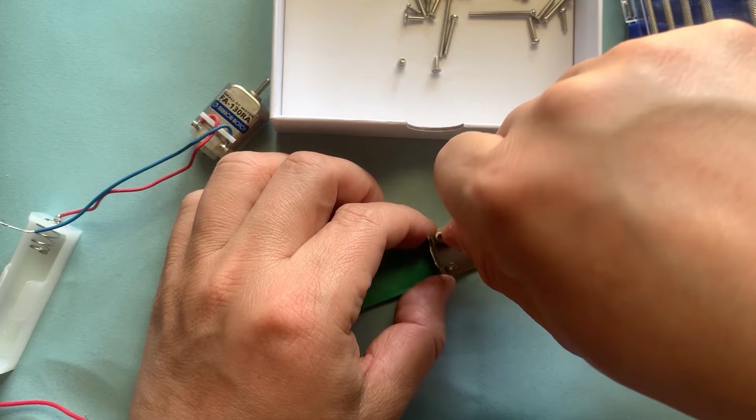When I use tools, the first thing is always safety. The second is preciseness. And the others are quite a lot, such as convenience, price, lifetime, and so on. The motor is small, but we still need to fix it firmly. I use 4 2mm screws. It should be okay, I think.

Then the challenge comes with the shaft coupling. The Mabuchi DC motor uses a 2mm shaft, but usually a mini tool shaft is 2.3mm. It will take more than 2 weeks if I buy it from Amazon Japan. I think it is caused by the COVID-19 influence, since the products are usually made in China and it will take much longer to deliver.

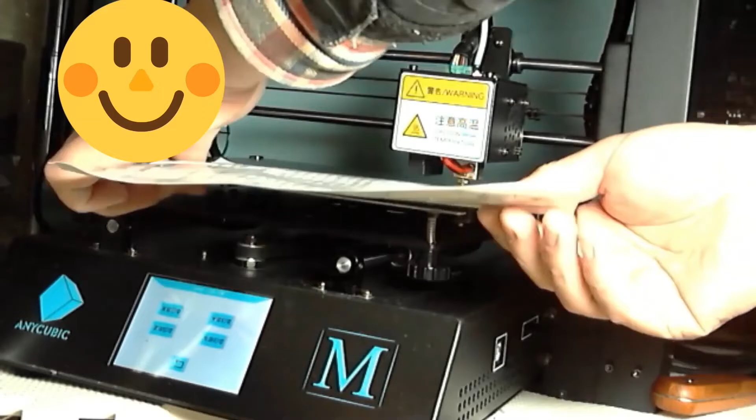Okay, I have a 3D printer now. I can make it myself. Let's do it. The simplest way, just change 2mm to 2.3mm using a straight shaft. I design, print, and test.

It's not stable. Even the drift is small, such as 0.2mm, the high speed enhances the effect and makes it unstable. Then I decided not to use a rough screw and use a screw tap. Try it again. It is still unstable. If I fix the motor, then the head of the drill will vibrate. I figured out that may be caused by the 3D printer processing program. If I fix one side and let the other side be a little bit flexible, the situation may become better.

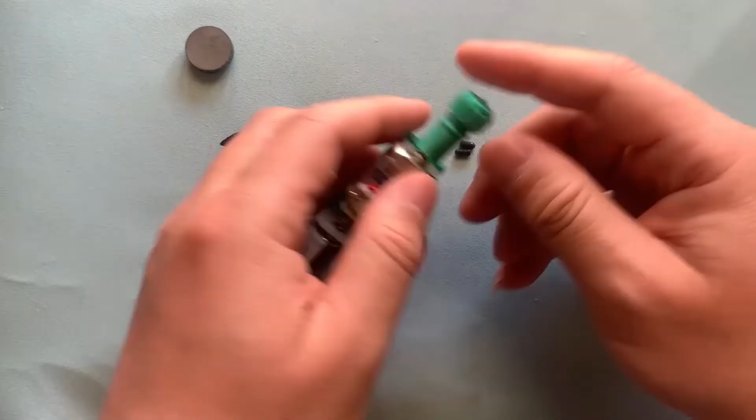I changed the top side to a shaft coupling type. First, try 3 separate types. Still no change. Then, change to 4 separate types. Also no change. I found out that the thread directly attached to the separate parts is not good. It may break the balance between each separate part.

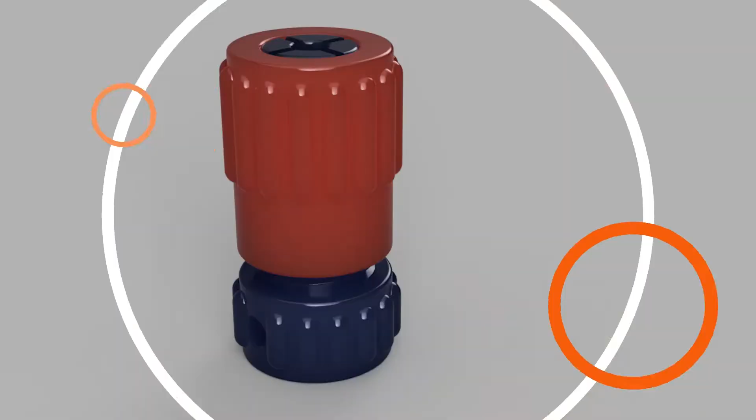I changed the head to a flat type like this. I changed some parameters such as the slit size, the height, the length of the screw, etc. Finally, I got this. It's really good. Now the most difficult part has been solved.

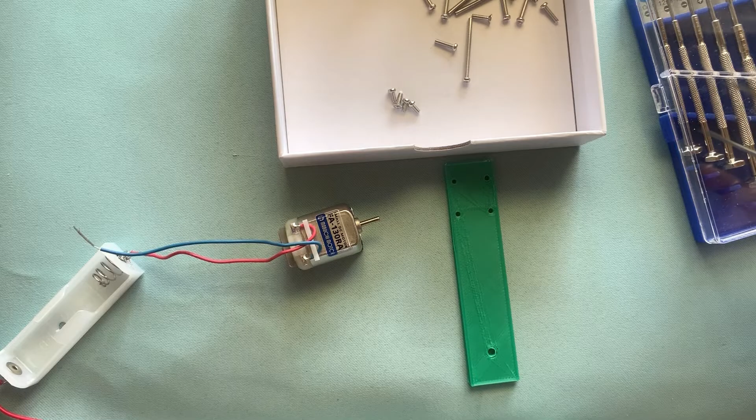I must choose a flat place to fix the motor. Of course, not the simple flat test table. One idea comes to my mind. How about using a pistol, like a revolver? The motor can be settled in the revolver part. Make a room for 2 AA alkaline batteries in the hand part. Okay, let's do it. I searched the internet to find something interesting. There are quite a lot. Finally, I choose this as my model.

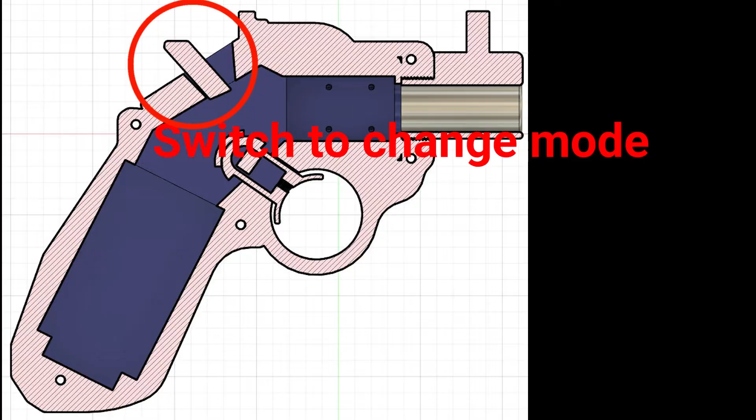I will use Fusion 360 to make it for my mini DC motor drill. First, make a chamber like this. Then put the AA battery box in the hand part. Since I use 2 AA batteries for the power supply, I add a switch to give the drill normal and turbo mode. The circuit is like this. Add a trigger to turn the drill on or off. Add a barrier to protect the head of the drill.

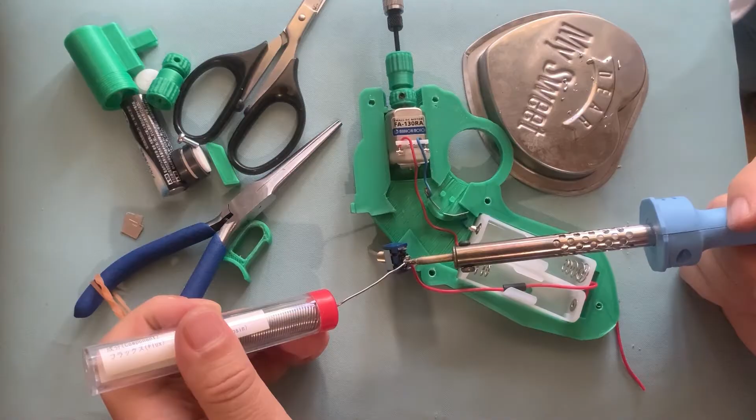Print all parts. Make a little bit of modification. Assemble it. Let's see what this mini tool can do. On, off, it works. Normal. Turbo mode also works correctly.

I can stop the motor by bare hand. This means this is quite safe. But take care, don't hurt yourself. My hand is well trained and has thick skin. It can drill a hole in a soda can easily. Others like cutting, grinding, also no problem. It is enough for me now, since I only want to make a mini tool.

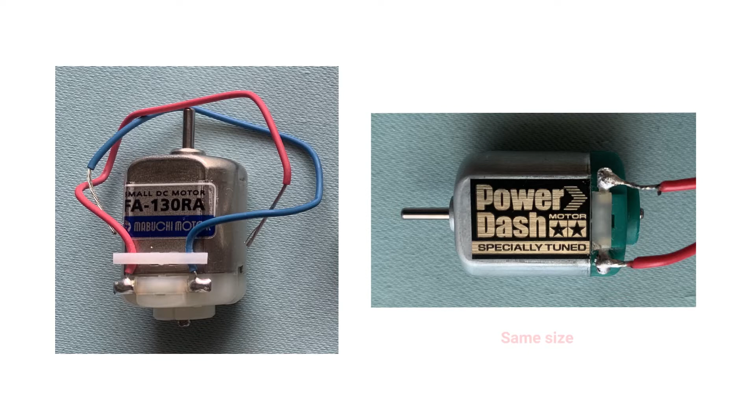And if we change the motor from FA130RA to the Power Dash motor 15317, which is completely the same size, the speed goes from 8,600 to 23,600 RPM, almost 3 times faster. The normal load goes from 0.39 mN·m to 2.0 mN·m, almost 5 times more powerful. Let's see what will happen.

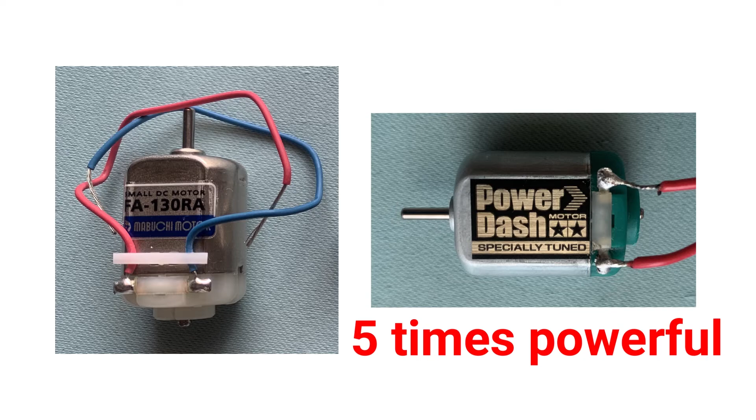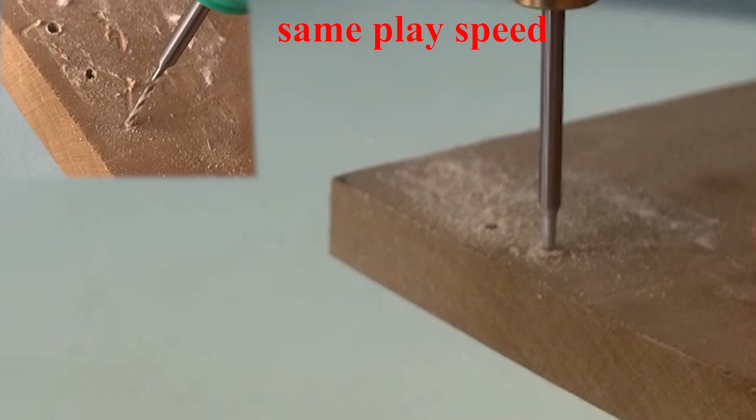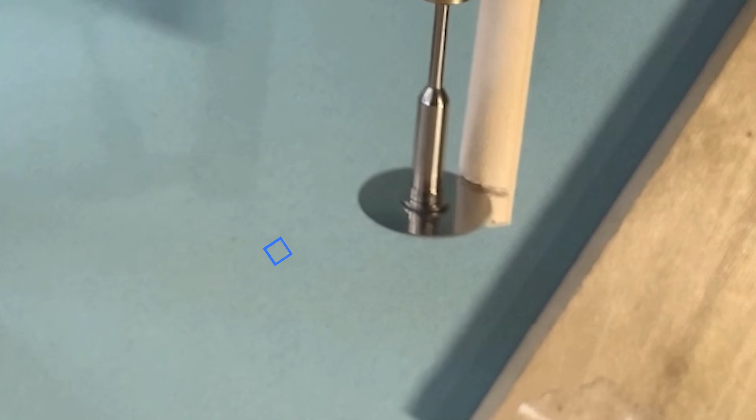It is easier to drill a hole in a soda can. Also, it drills a hole in a wood board very easily. Cutting is more efficient. Everything becomes easy, but it may be a little bit more dangerous than the normal one. Take care of yourself. That's all for today.